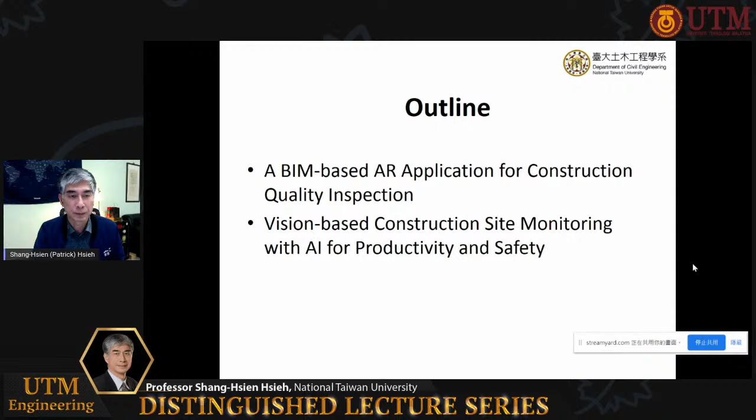There have been many literatures that you can find in recent years related to these two topics. But I will just use our own experiences, the research that we have conducted at National Taiwan University, to share with you our views and experiences on the BIM and AI application to the construction industry.

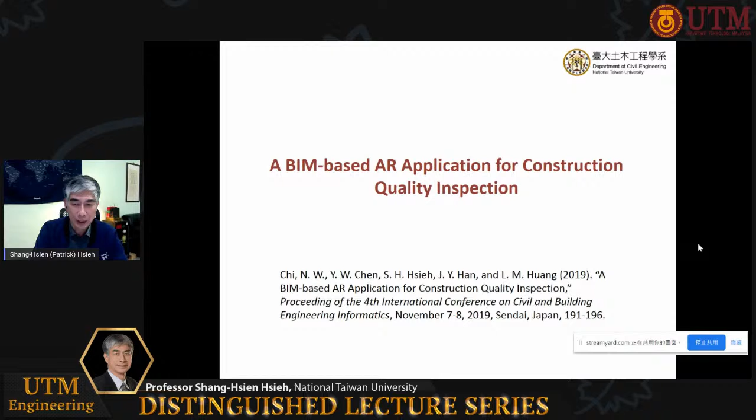So if you want to get more technical details, of course, you can follow the reference to dig out the paper. This is a paper we published last year in the 4th International Conference on Civil and Building Engineering Informatics held in Sendai, Japan. So this was not online. At that time, we were still okay to have the face-to-face conference.

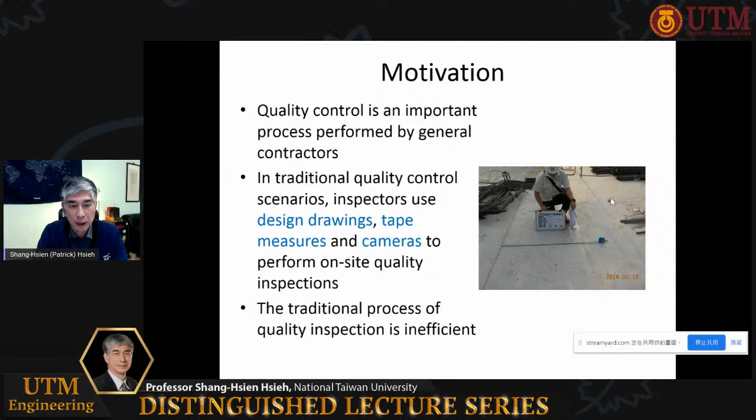So the motivation for this research is as follows. We all know that quality control is an important process performed by general contractors. But in traditional quality control scenarios, inspectors use design drawings, mainly paper-based, tape measures and cameras to perform on-site quality inspections. This is not very efficient. So we are thinking that there must be a better way with the current new technologies that we can help the quality inspectors to do a more efficient and better job.

So the solution we propose in this research is to integrate BIM and AR technologies. We all know BIM provides detailed information of the building. Usually that was provided by 2D design drawings in the traditional way. But now we have this 3D digital model that can help us to understand the space that we are constructing much better.

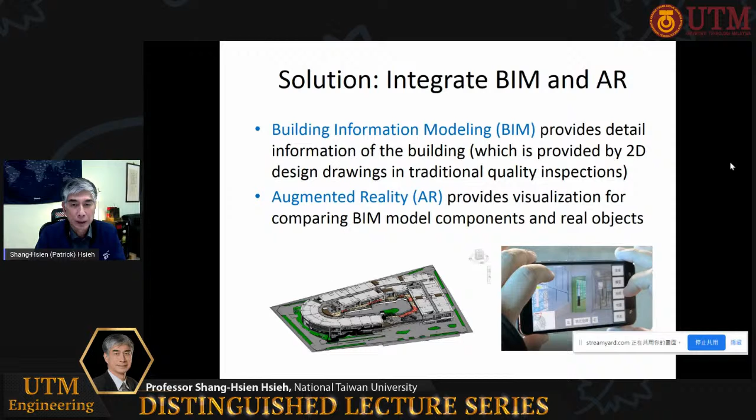And then AR, augmented reality, this technology has been available for a long time. But I think a lot of young people know about this technology more in the games they have been playing. This technology provides visualization for comparing, in this research, BIM model components and the real object. So these are the basic characteristics that we use from these two technologies. And so in this research, we try to build a smart quality inspector system. In the following slides, I will try to show you how we can integrate these two technologies to help the quality inspectors to do a better job.

So the first thing is I will try to quickly describe the system. The system has one part that is on portable devices like an iPad or cell phone. For example, here we just use the mobile phone as an example. The inspector will carry this mobile phone. That's basically the main thing he needs. And then on the mobile phone application, we can handle images, and right now the mobile phone can also help us to get the location information.

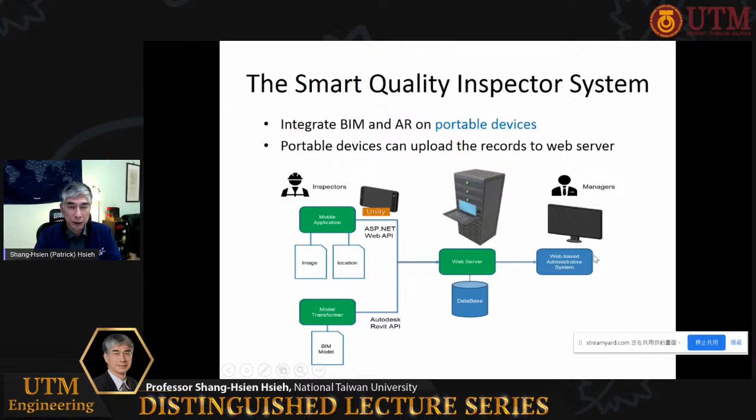And then of course we need the 3D BIM model, so we need to import and transform the BIM model into the mobile devices. We cannot just use the original BIM model in the modeling software because it's too heavy. So in this case, we try to convert that into a lighter weight model. And then on the server side, we also build a system for the managers, so once the information gets uploaded into the server through the web into the database, the manager can look into the information collected by the inspector.

So this is the mobile device that we prototyped. We use the Android system, but you can also use the iOS system, iPhone, that would be fine. And then we use the Unity 3D framework to export the BIM model from the PC to the portable device. Unity is a platform that is commonly used by games. So it's kind of a game engine. It provides very nice 3D capability for us to manipulate the 3D model.

And then, since we already have the model in the mobile device, the inspector can now overlay the model on the real object, just like what you can see here. We have this model, and through the camera's lens you can see the real space, and then we can overlay the model on the real object shown on screen. And then the inspector can compare this and make comments. So you can take a photo and attach a description on the photo as a record. And then they can upload this record to the web server.

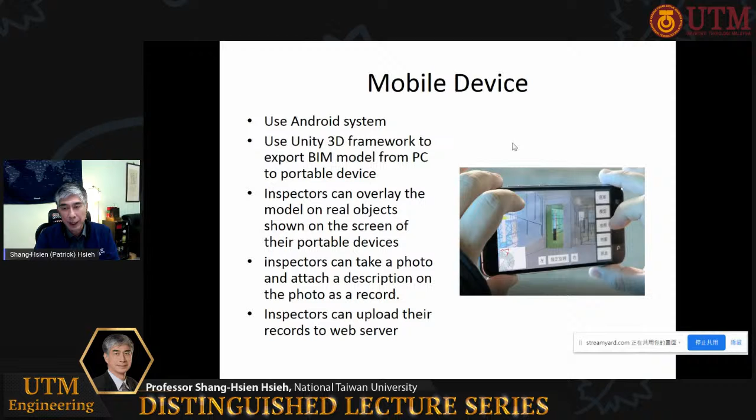Either if the construction site already has Wi-Fi, they can just do it right away, or they can store that information on the mobile device and then upload it later when they return to their office. So this just shows you more clearly that you can see the overlay of the model and also the real object.

And then there's a floor control. This is just for you to quickly jump from one floor to another to navigate inside the digital model. And then we also show you the floor map, so you can know your current position on the floor. And then there's some photo control for you to lock. Sometimes for convenience, once you have already overlaid the BIM model and the real object perfectly, you can lock it so it won't get shaky.

And then there are some menus here for different functionalities that you can play with. With the model, you can take the photo, you can set some features of the map, and if it's not easy for you to type the text, you can just use the recorder to record the information, and all this will be associated with the photo that you are taking.

And so this one is for model control. I'm sorry, these are in Chinese, but I will try to explain them to you. This is for the transparency of the model. A lot of times you want to adjust the transparency of the model so you can overlay the model on the real object and also see through the model. And then you can turn on and off the floor, the wall, columns, ceilings, and some decorations.

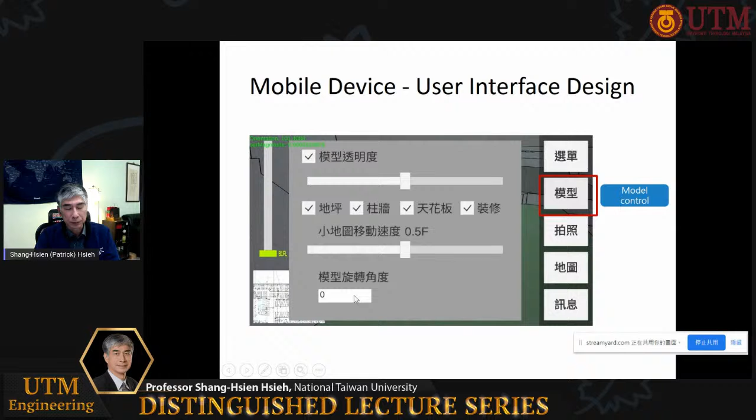So another thing that we tried is, when we are taking the photos, since we overlay the images and the model, we can back calculate the position we are in within the digital model, and we also know the location on the real side, so then we can back calculate how to map the photo onto the surface of the 3D digital model.

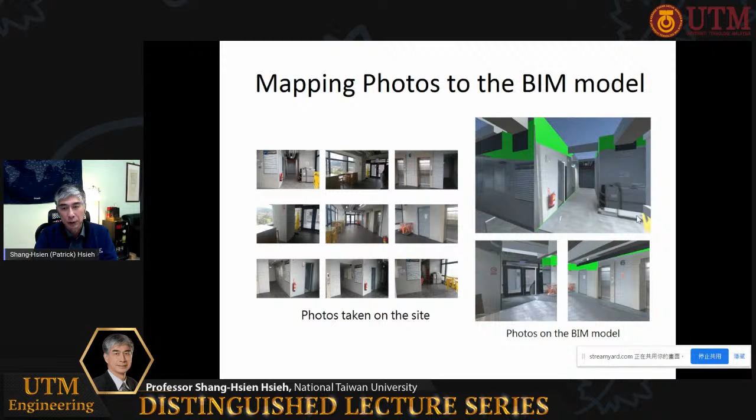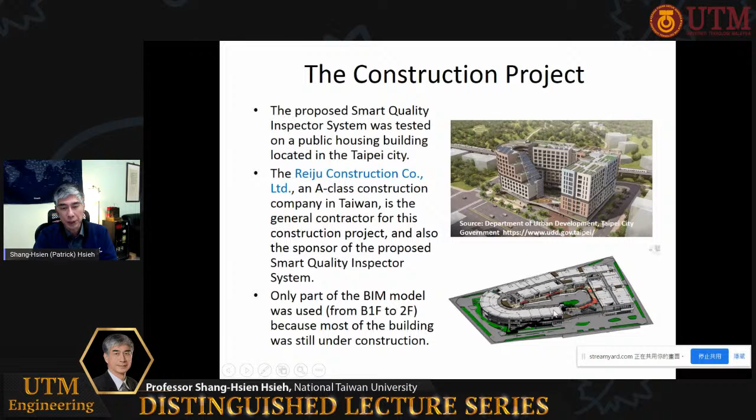In this way, we have a better way to put all the information together and relate the one-to-one mapping between the real object and the digital twin. And then we tested the tool on a real construction project. This is the project; at that time it was under construction, so we only used the B1 to second floor BIM model to do the test.

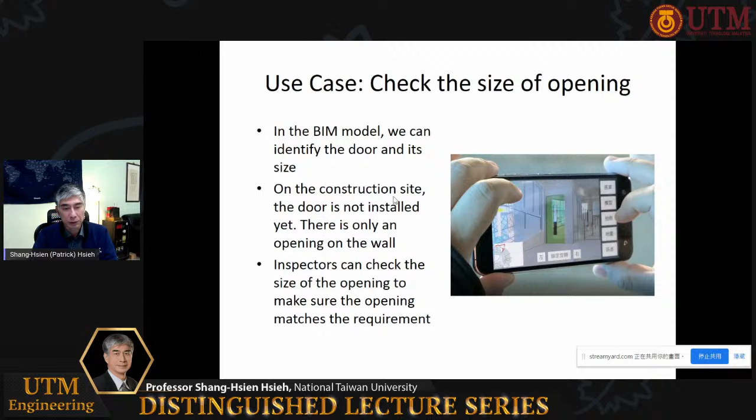The reason for having this tool is that one day a site manager told me he usually has a very good idea of where to look for problems on the construction job site. But a lot of times, problems pop up in places he didn't expect. It's very difficult for an inspector to pay attention to things he was originally not intending to check. So it's better if there's a way to do more thorough checking, and this kind of photo taking can help them a lot. So that's why we got into this kind of research.

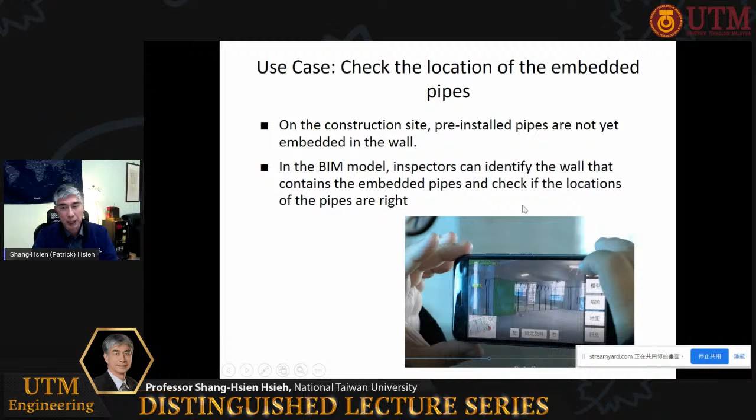And then you can also check the location of the embedded pipes. Although the pipe has not been installed, you can overlay the BIM model onto the job site and then try to check if the locations are right.

So just a quick summary for this part. In this research, a Smart Quality Inspector System is proposed and prototyped, and we take advantage of both the BIM and AR technologies. And I think it's obvious through the presentation, you can see when this technology is compared with the traditional quality inspection, it's much more convenient, and the inspector should be able to inspect a larger area within a reasonable time frame.

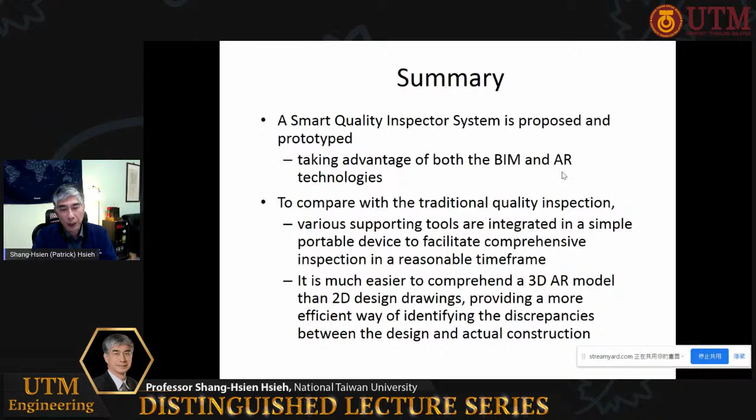And it's much easier to comprehend a 3D AR model than 2D design drawings. This will provide a more efficient way of identifying the discrepancies between the design and actual construction.

Okay, now I'm going to move into the second part of my talk. This one is on vision-based construction site monitoring with AI for productivity and safety. So I will quickly go through one paper that we published in the 20th International Conference on Construction Application of Virtual Reality. Unfortunately, this one was held online in late September and early October due to the COVID-19 pandemic.

And then I will show you another research that we have recently finished and already submitted the paper to Automation in Construction, on temporal image analytics for abnormal construction activity identification. This one is for construction productivity issues. And then I will show you some recent works that we haven't published, but those are on construction safety.

So I think the motivation for vision-based monitoring is that nowadays we have a lot of tools that can help us to take videos from the construction job site, either through UAV or a camera, or right now even some robotics. They can carry the camera, and it's easy to get those video streams.

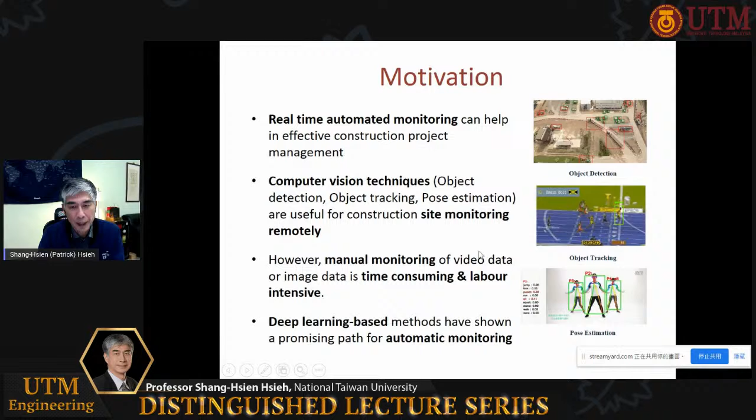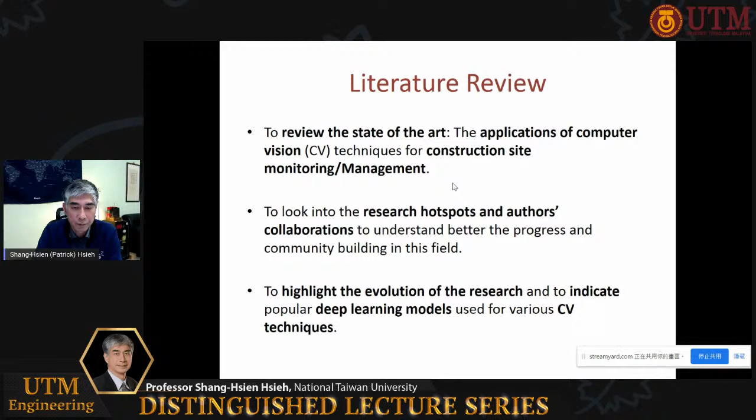So first, about the literature review. Before we started the research, we started by reviewing the literature on the application of computer vision techniques for construction site monitoring and management. And then we tried to look into the research hotspots and authors' collaborations to better understand the progress and community building in this field. And then we tried to highlight the evolution of the research and to indicate popular deep learning models used for various computer vision techniques.

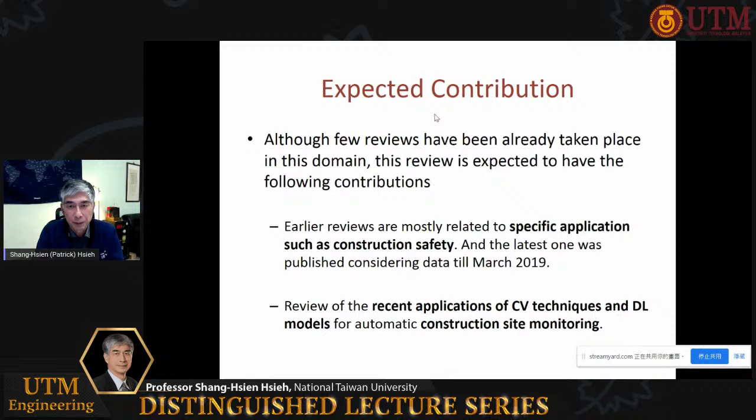So the expected contribution from this literature review is that we found that early reviews are mostly related to specific applications, such as construction safety. And the latest one was published considering data till March 2019. And the review of the recent applications of computer vision techniques and deep learning models for automatic construction site monitoring is our major target for this review.

And so the methodology that we use includes bibliometric and scientometric analysis. So the first thing is that we use keywords to search the Web of Science Core Collection to get a number of papers. And then we only select papers published in English. And then we go through the papers and try to identify those unrelated to computer vision and construction site monitoring, and then we remove those.

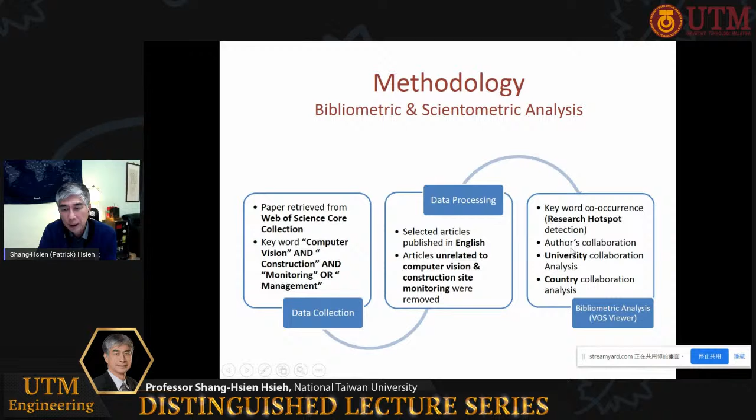And then we perform the analysis to check the keyword co-occurrence to identify the research hotspots, and also try to identify the current authors' collaboration, and do some university collaboration analysis and country collaboration analysis. I will show you the result.

And through the content analysis, we try to classify the research into three major categories. One is about the construction applications on productivity, safety, and monitoring. And then there are some computer vision applications. So this is more that before we can apply those computer vision techniques to construction, we have to do some research on computer vision and their applications.

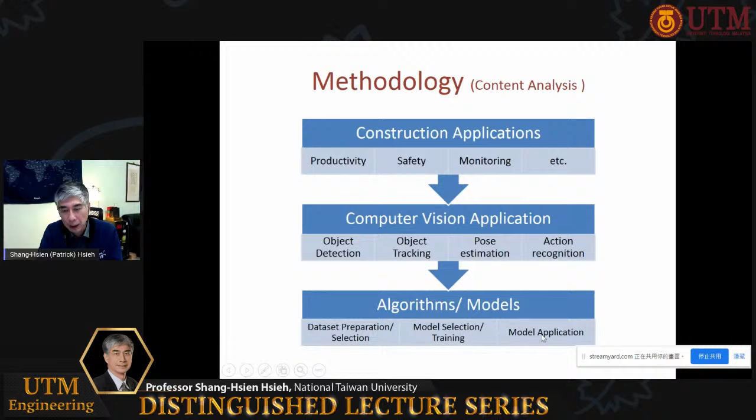So that involves object detection, object tracking, pose estimation, and action recognition. I will explain this further later. And then there are algorithms and models for deep learning, the AI part. And for this one, we need to prepare the data set or select the data set. And then we need to select the model and then train the model, and then we can apply the model to real application.

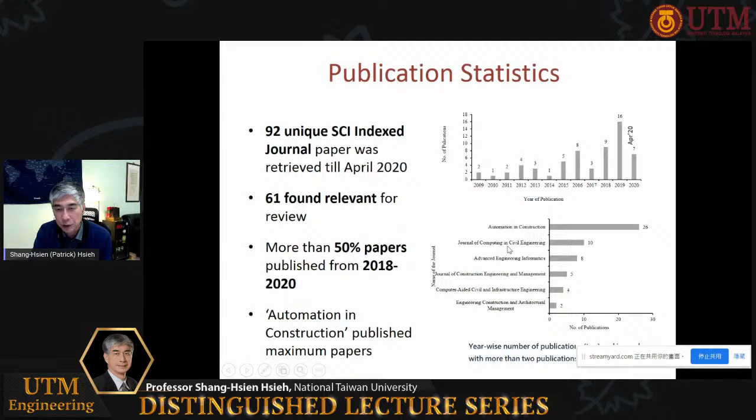So from the publication statistics, in the 92 SCI index journal papers that we retrieved, we found that 61 are relevant for review. And you can see that more than half published in recent 2+ years, starting from like 2018. And then in terms of journal publication, you can see most of these papers are published in Automation in Construction. The second one is Journal of Computing in Civil Engineering. And the third one, the Advanced Engineering Informatics.

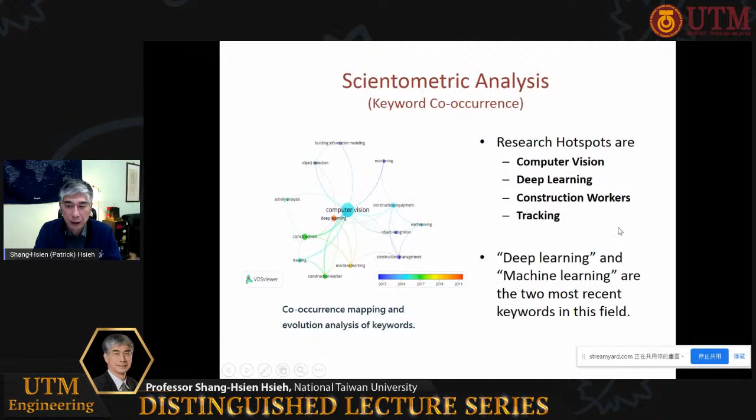And then if you look at the keyword co-occurrence map, we can see that the research hotspots are computer vision, deep learning, construction workers, and tracking. And deep learning and machine learning are the two most recent keywords in the field. And from the author collaboration analysis, and also looking at the research organizations, you can see these 4 organizations have more papers published, and also these are the citations.

So you can see that the papers published from Hong Kong, in China, they have more number of papers published. And then the second group are from US, that's University of Illinois and University of Michigan. Although they have fewer papers published, they attract a lot of citations.

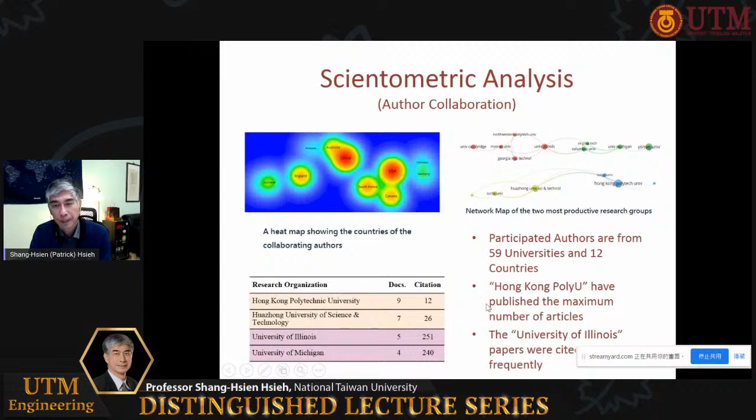And then, as I mentioned, the computer vision techniques related research, we call that preparatory work before we can apply those techniques to construction. And then the papers working on the construction applications, we call them applications here. And you can see 84% of the papers are in this category, and then we have 16% on the preparatory work research. And you can see that construction safety and construction productivity are the top two applications right now from the literature.

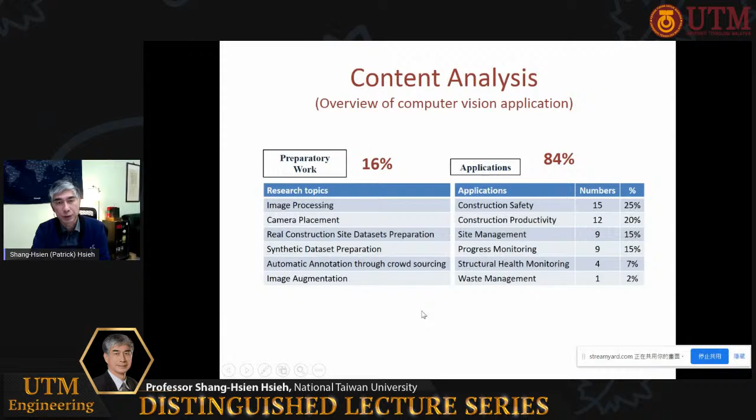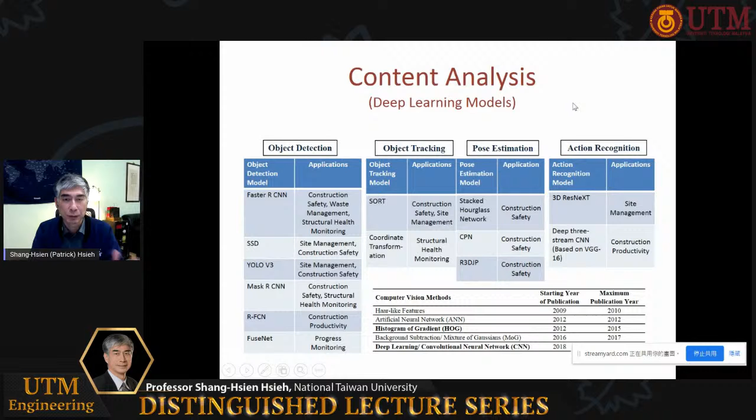And then for the deep learning AI applications on image processing, you can see the models used for object detection and their applications, and then for object tracking, for pose estimation and action recognition. I will explain why we have this kind of application of techniques, but I'm not going to go into the details of all these models. I just try to show you, and you can easily find similar results from the literature, what model has been mostly used for what type of applications. So this is what this table shows.

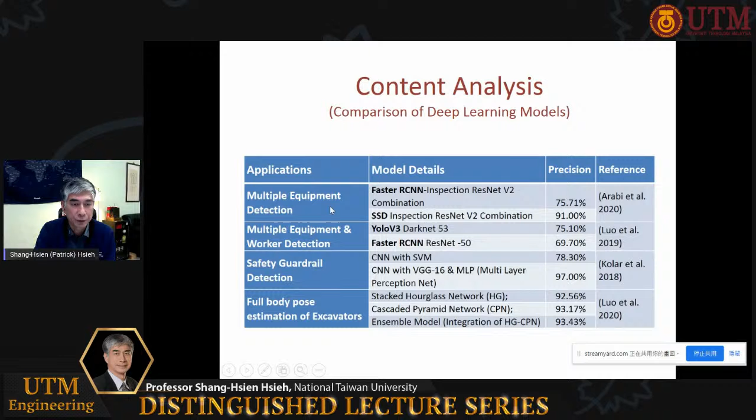For the same application, people may try different deep learning models, and they all get different kinds of results. Some are better in one application, but may not be better for all other applications. So a lot of times in research, you have to try different models, and even different combinations of the models. Okay, so this is just a quick summary for the literature review.

Most of the papers related to deep learning and machine learning have been published very recently, starting from 2018. And then US and China are the most productive countries for paper publication in this field. About 85% of articles are on computer vision applications, and we classify them into 6 types of applications. And different deep learning approaches or models have been identified as popular approaches for different computer vision applications, like Faster R-CNN for object detection, SORT for object tracking, stacked hourglass network for pose estimation, and 3D CNN for activity recognition.

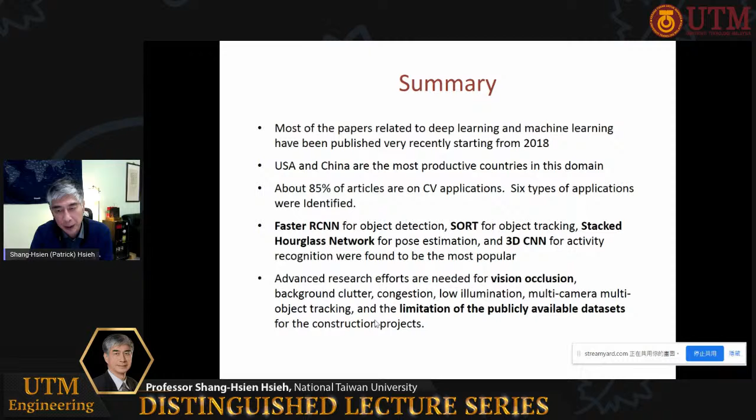We also found out that advanced research efforts are still needed for vision occlusion, background clutter, congestion, low illumination, multi-camera, multi-object tracking, and the limitation of publicly available data sets for construction projects.

Now I will move on to another research that we have done recently. This one is that we try to see if we can identify the activities from the data stream or video stream from the construction job site, and then try to analyze those video streams, and then we can identify abnormal activities. Because abnormal activities may affect productivity and workers' safety.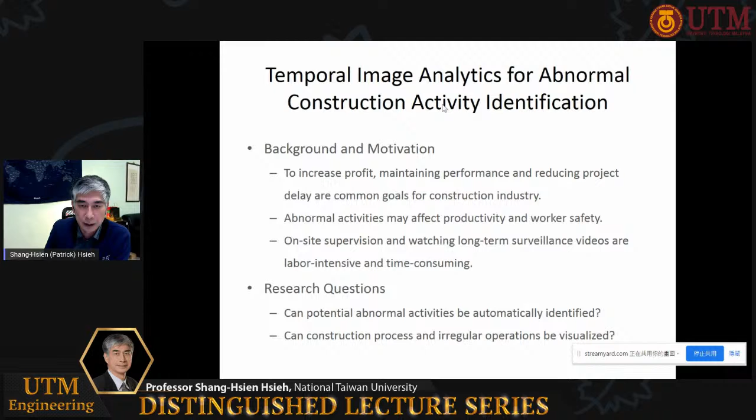So we would like to develop an approach that will be able to automatically identify potential abnormal activity on the construction job site. So that's the basic idea. For example, in the photo here, you can see that if we want to monitor this kind of earth moving activity, the first thing is we have to detect the machineries first.

Once we detect them, because they are moving, they have the action. So we also need to track the objects on the construction job site, and then we also need to identify that these two machines are working on the same activity. They are kind of a group. So this kind of relationship identification. That's why we need to go through object detection, object tracking, and then action recognition to identify if that action is the one that I would like to monitor.

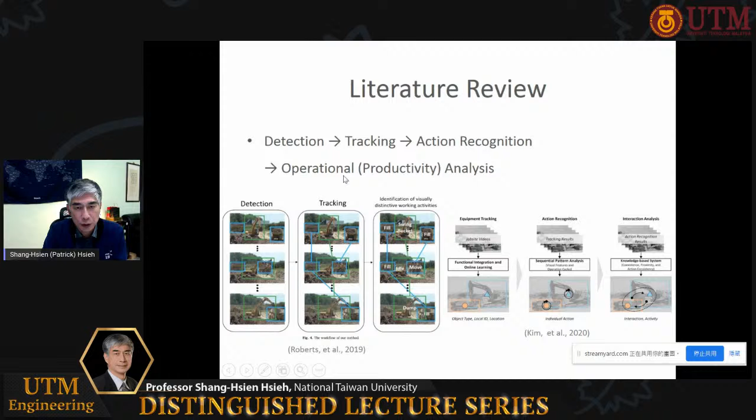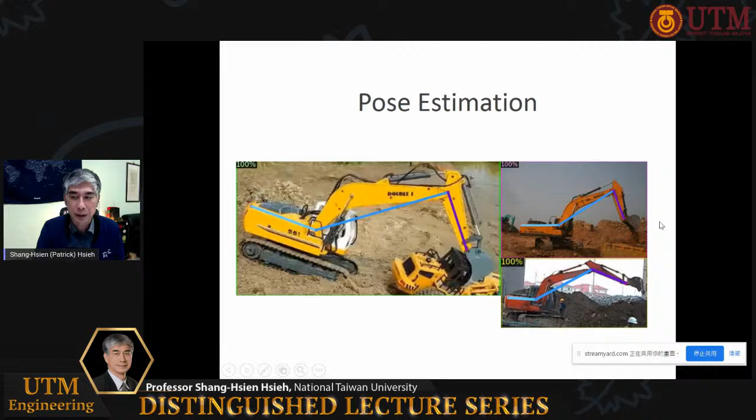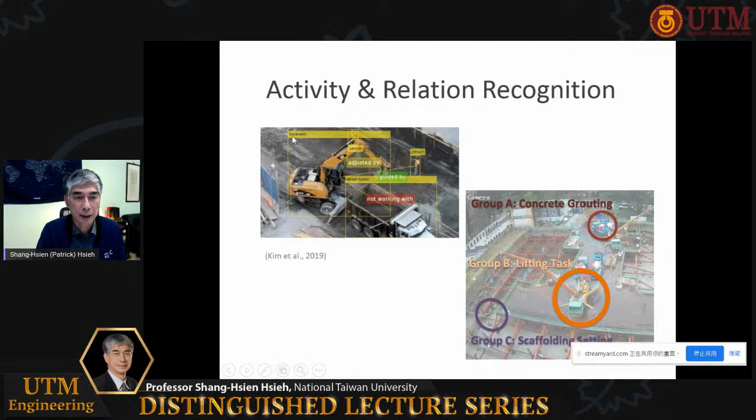And then once we have that, we need to find a way to do operational or productivity analysis. So, for example, like for this one, we also need to track the pose, so that we know what's the current action of that particular machinery, and that will be related to the activity items that we would like to monitor. And then we also need to find out the relationship between, for example, the truck and the excavator.

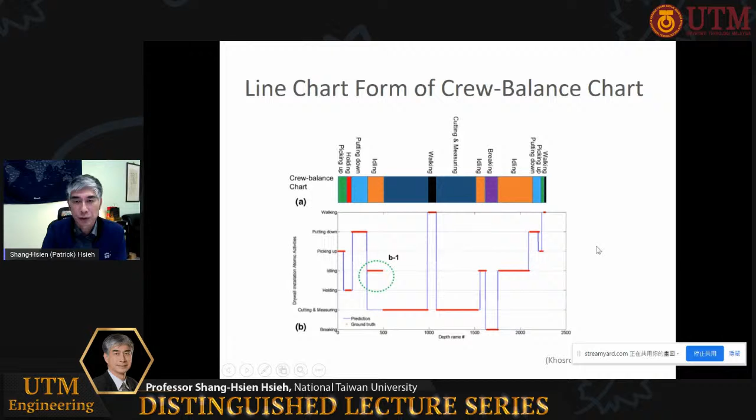And then another technique that we use is called the crew balance chart. And we use this line chart form. So here are the activities, and this is the timeline. Through the videos that we recorded, we need to identify what kind of activities are going on with one particular object that we identify, say the truck or the excavator, and then the time duration for that action, and then they may shift to another one and another one. So this is called a line chart. This is for analysis of the action of the object.

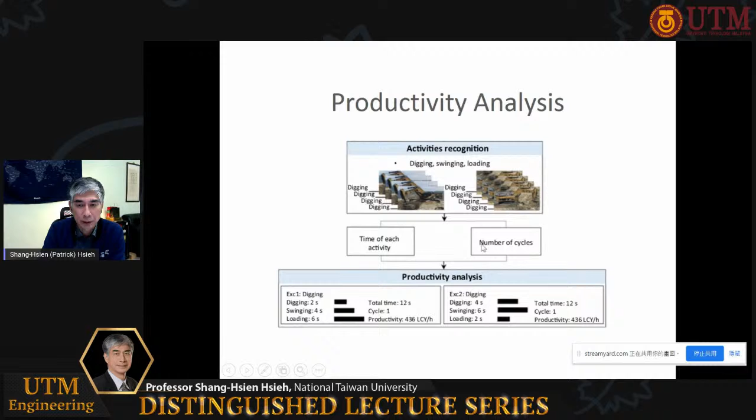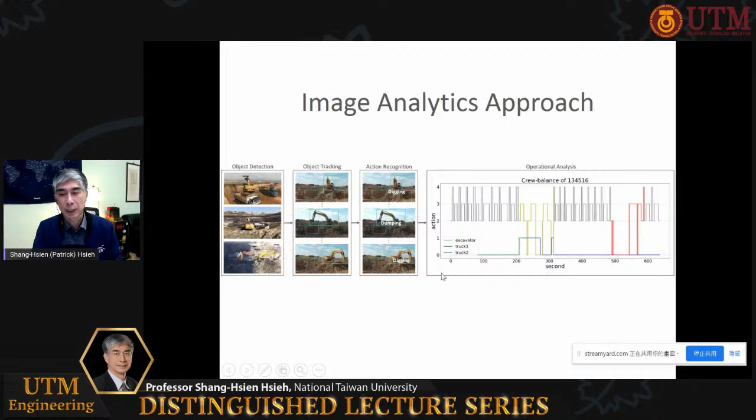The truck again. But then here at the 500 second, somehow the activity stopped for a certain period of time. Okay, so those are the analysis. Through this kind of analysis, we can identify if there is an abnormal activity. So I'll just quickly show you one example in the paper.

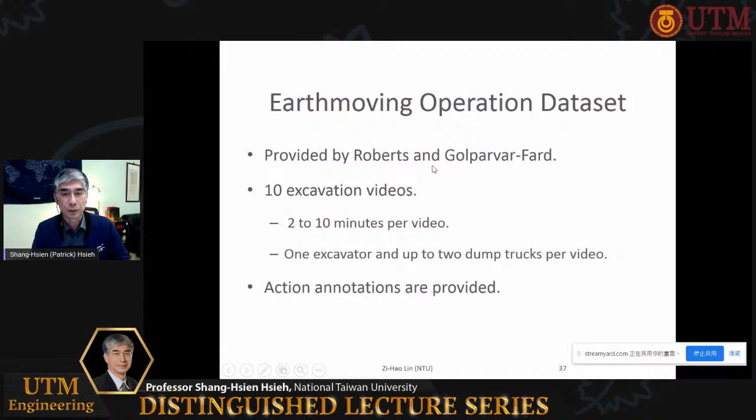So we use the data set provided by Roberts and Golparvar. For all this kind of research, we need to first get a good quality video or photos or a video stream. And then the researchers need to label all the images to identify the object and even label the activity. And so we got 10 videos. They are 2 to 10 minute videos, and all the videos have one excavator and up to 2 dump trucks. And then we need to do action annotation. But it's very nice that Roberts and Golparvar have already done the annotations and the tagging for us.

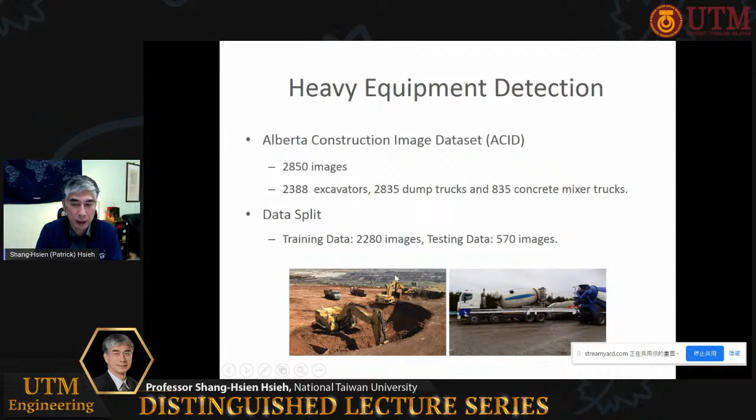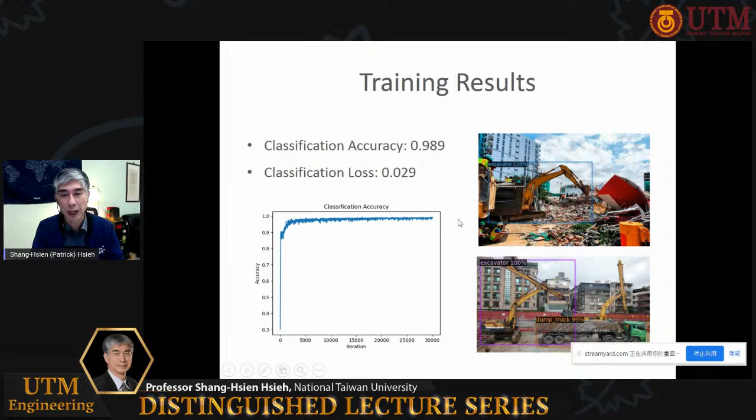That's why it's convenient. And then we also use the Alberta construction image data set. For those, we can split the images to train our AI model, the deep learning model, to be able to identify the object, the excavator or the truck. Okay. And so we train the model, and you can see the accuracy after about 5,000 to 10,000 iterations reaches more than 90% or 95%. And so then we can apply this model for the object identification.

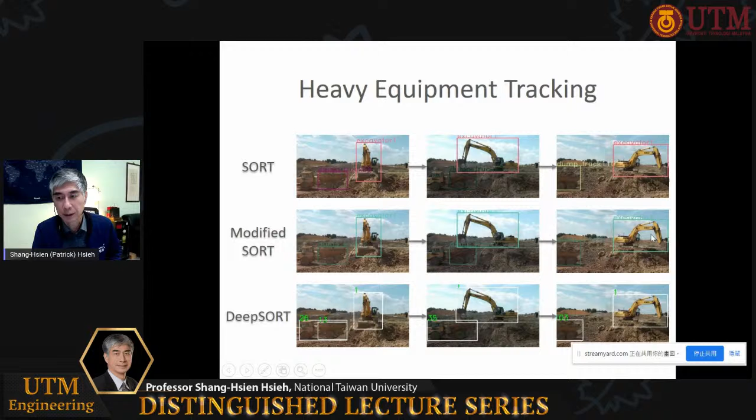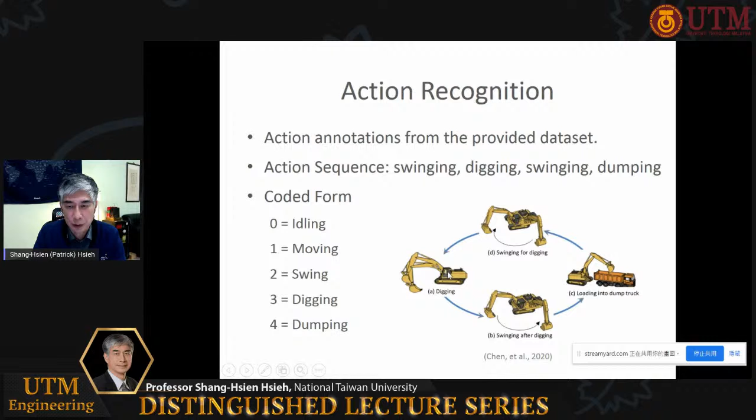And then we need to do the equipment tracking. So we compared 3 different deep learning models to track the equipment's motion. And then we also need to recognize actions. So of course, we also need to label the images to train the deep learning model, and later on, they can help us to identify which action the machine is performing.

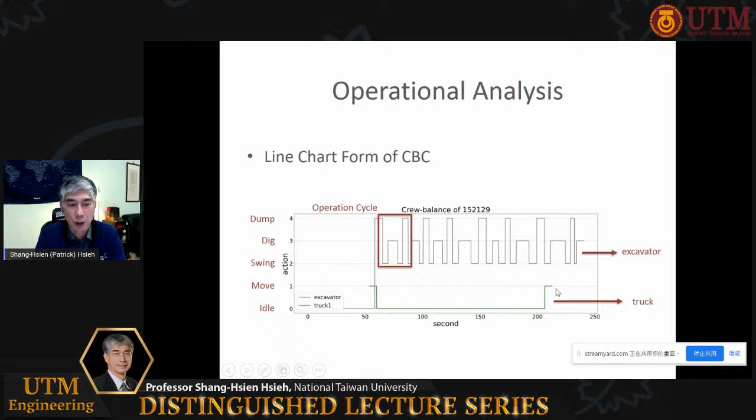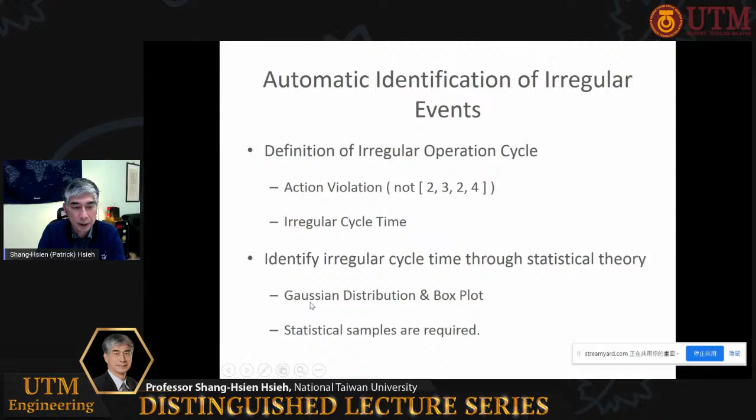And then we try to convert those automatically recognized actions into this line chart form of the CBC. And then you will get this crew balance chart like this. The upper part is for the excavator, the lower part is for the truck. Okay. And then we need to apply some statistical approach. Here we are trying to use 2 approaches to test it. One is called Gaussian distribution. Another one is called box plot.

And so we get 10 videos from the earth moving operation data set: 7 videos as the statistical samples without irregular operation, and 3 videos for testing. Those are with irregular operations.

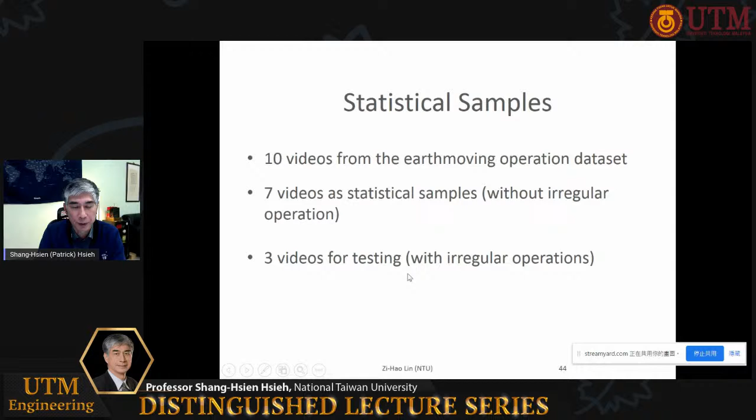And so we can see that, as I mentioned, during this operation one truck was fully filled, so it moved away, and then another one comes in. So that's why the excavator stopped action. But this is not abnormal. This is just a truck exchange.

So this is okay. But on the second part here, you have irregular cycles, and the truck is still here. So then we need to identify what kind of accidents or what kind of situations make the excavator stop their action.

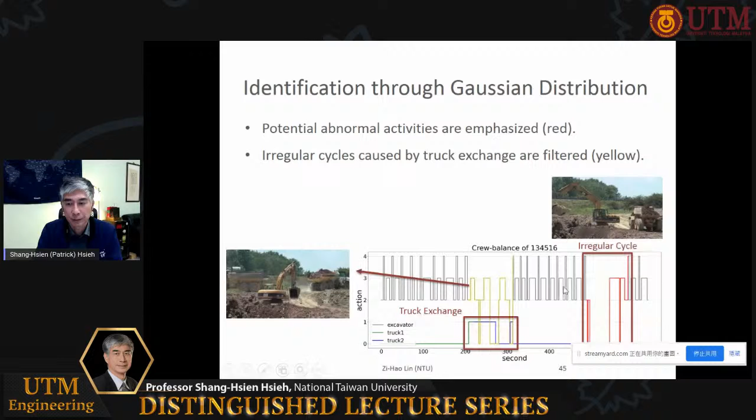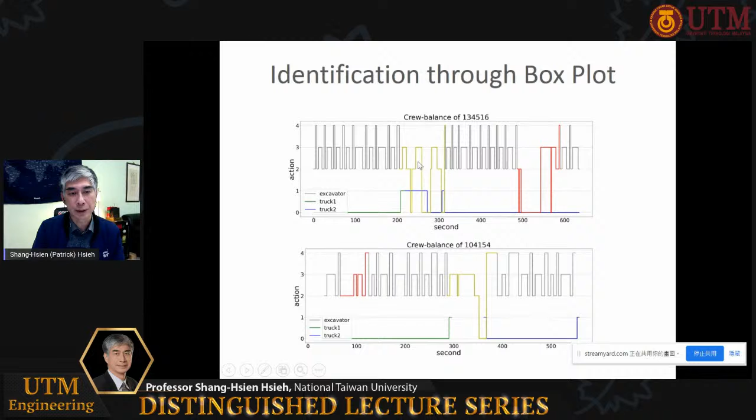So another way is to try to identify the abnormal activities through the box plot. So kind of setting a range of the box to check if some activity stops for too long, and then we will flag red. If we see in some reasonable time frame that there's another truck coming in, then we know that it's just a truck exchange. So we won't flag that as abnormal activities.

But anyway, at the end of the analysis, we can produce something like this for the manager. So we can say, okay, this is the total operation duration, but for the second one we identify some irregular cycle, but this is for the truck exchange that we identified. But there's another one that we are not quite sure what happened.

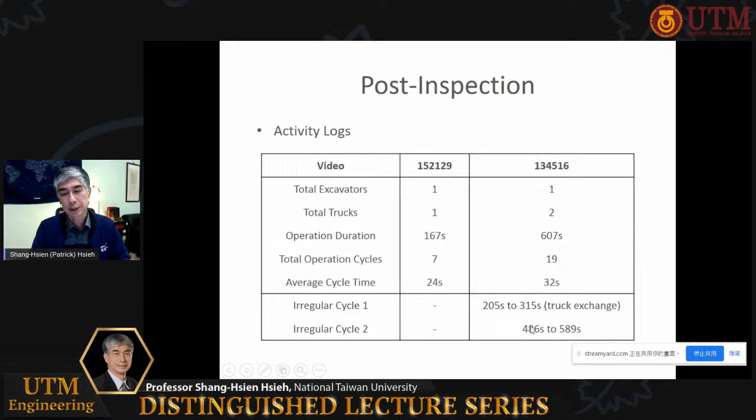And then we show the manager the time in the video, so they can quickly jump into the segment of the video to visually identify what's going on over there that affects the productivity.

And then there are many other applications that we have been trying for our contractors to identify potential construction safety issues. So right now, as I mentioned, with this kind of object detection technique, computer vision technique, we can identify if a person has worn the protective equipment or not.

So the green box means it's okay, it's fine. But the red one means the workers are not wearing the protective equipment according to the requirement.

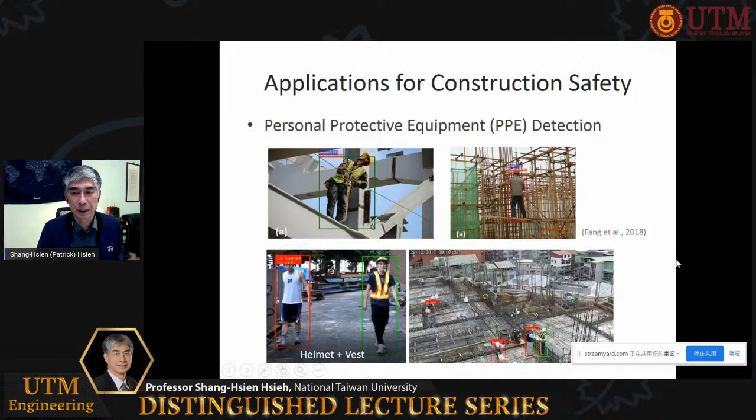Okay. And then there has been some research to identify unsafe behaviors. So for this one we need to identify the pose of the worker, and then try to let the job site manager know that some workers may need to be trained so they can avoid injury during their work.

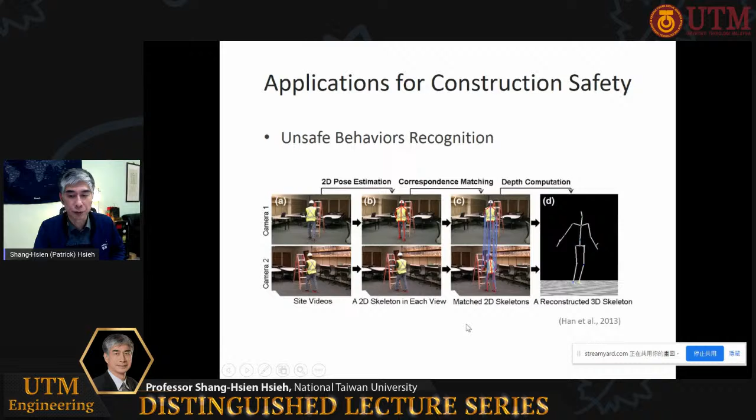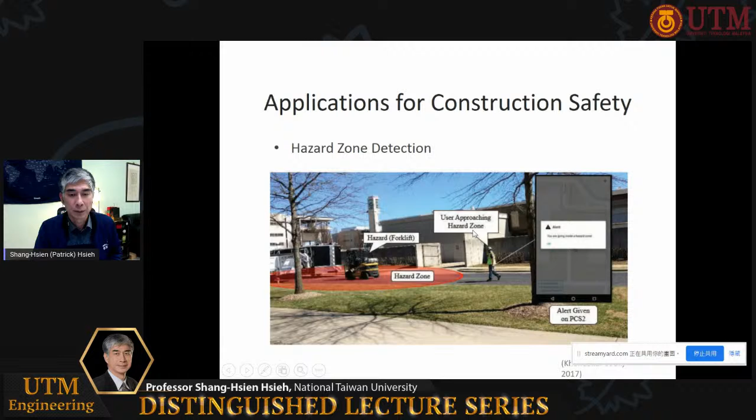And then another one that we are currently trying is hazard zone detection. But for this one, right now, we are trying a simpler approach. In the construction job site, a lot of the time they will use this red cone to identify the restricted area or hazard area, and so people should not get across this surrounding line into the area.

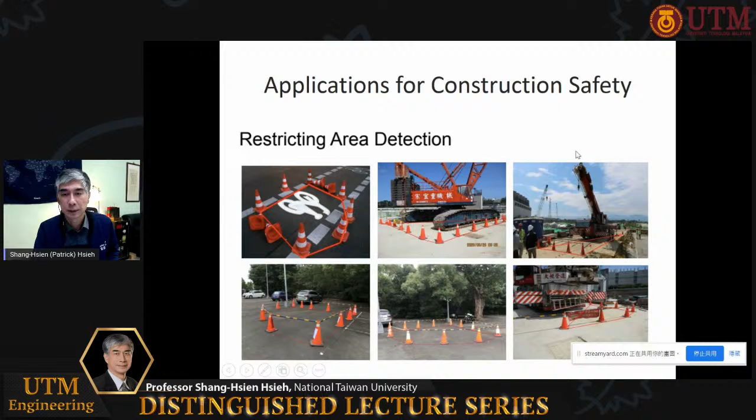For example, there have been some crane operations, and people should avoid getting into the zone underneath the crane operation. So right now we are trying to see how we can identify the cone, then automatically identify the zone, and if someone gets into the zone, we can send a warning. So that's the research we are currently working on with some contractors right now.